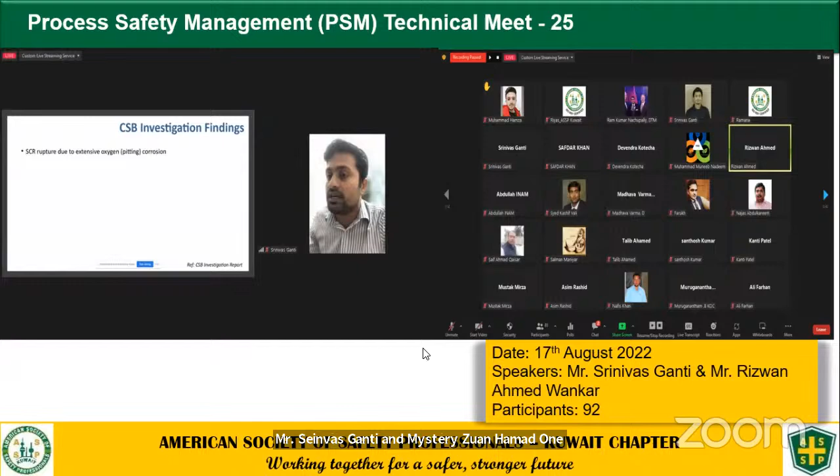We recently had a Toastmasters meeting, which is very important for us in our job careers, especially for enhancing communication skills. This is a good platform for our members and non-members who can join our Toastmasters Club.

We have a few upcoming events. As our President, Mr. Mazhar Sheikh, shared with you, we are very near to the PDC, and only 48 days are remaining. This will be the 11th PDC, and we are going to organize it face to face.

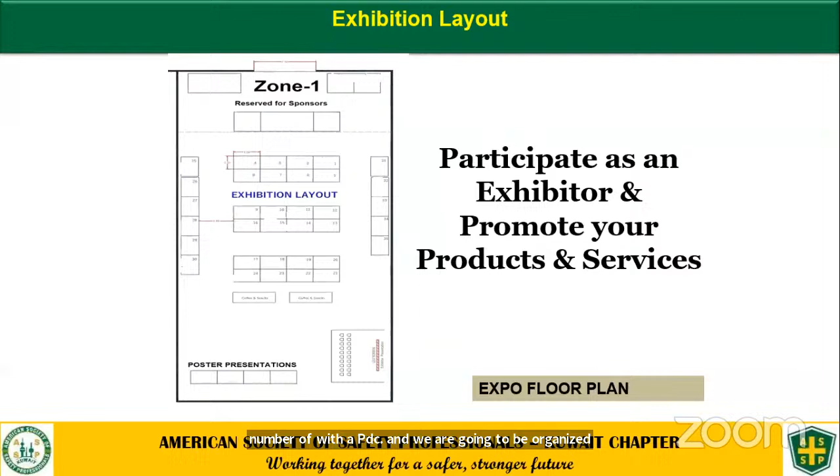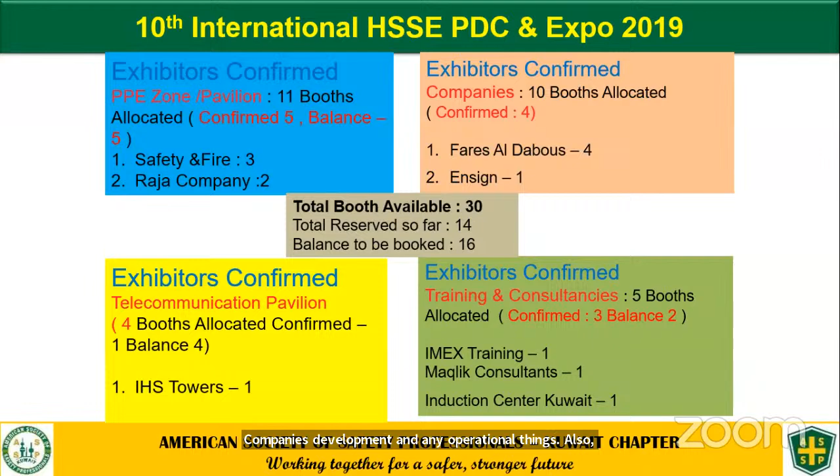We have the exhibition layout here. As participants, you can be an exhibitor and promote your company's development and any operational things. Details are in our brochures, and you can also visit our website to get more detail.

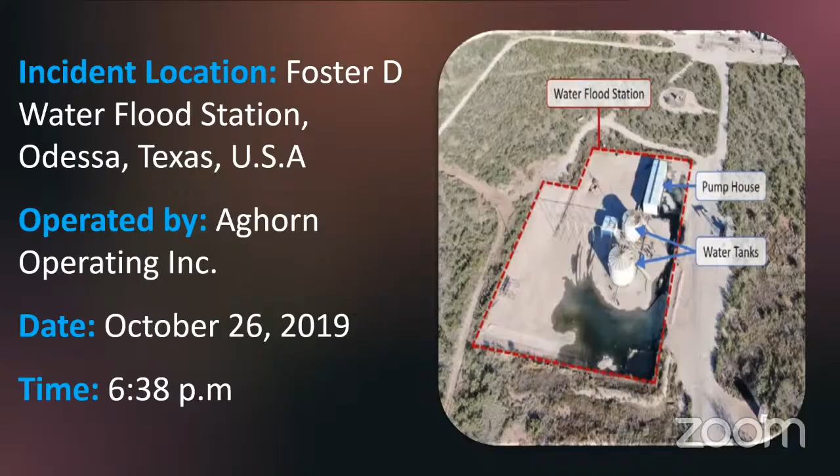So here you can see the incident location. It is operated by Aghorn Operating Incorporated. On October 26, 2019, at the Aghorn Operating Incorporated Waterflood station near Odessa, Texas, one Aghorn employee succumbed to toxic hydrogen sulfide gas that had escaped through a damaged pump. His wife was also fatally injured by the hydrogen sulfide gas while searching for him at the facility after he didn't return home. So our review of this event is about the unfortunate loss of 2 lives, but the lessons from this incident affect a multitude of other oil and gas facilities throughout the country that handle these kinds of toxic gases.

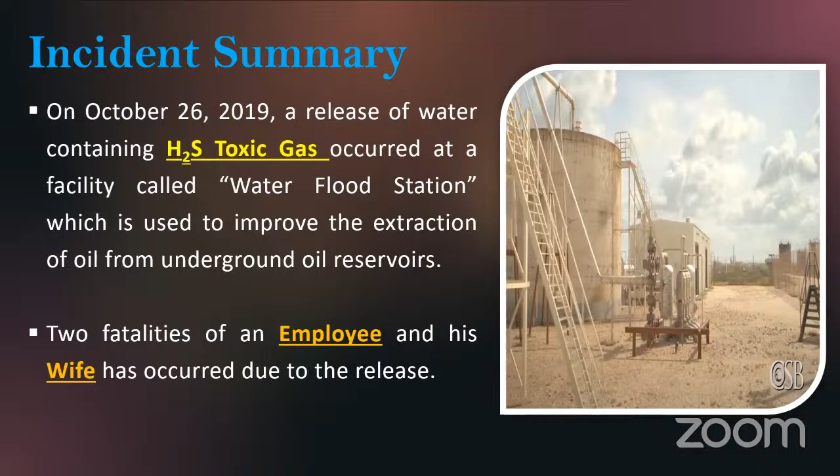This incident was both tragic and unnecessary, and we urge companies operating oil and gas facilities to understand the findings from this investigation and implement appropriate safeguards and trainings. We need to work together to ensure that our workers and community members return home safely every day. So before going to this incident summary, we will first understand the illustration of the Aghorn water flooding process.

The Aghorn water flood station is used as part of a process to extract oil from underground reservoirs in West Texas. Basically, there are two methods for extracting oil from the formation. First is by natural pressure, where the oil is extracted from the formation. The second, secondary method is injecting water by adjacent wells into that particular well, creating artificial pressure inside the formation.

The oil extraction starts at an oil well where pump jacks, which are artificial pumps, are used to lift oil from the underground reservoirs. The oil comes out from the ground along with some water. This mixture of water and oil is sent to tank batteries, where the water separates from the oil. This tank battery is a group of tanks connected to receive crude oil from the well. The oil is then transported for further processing, and the water is pumped through pipelines to the water flood station.

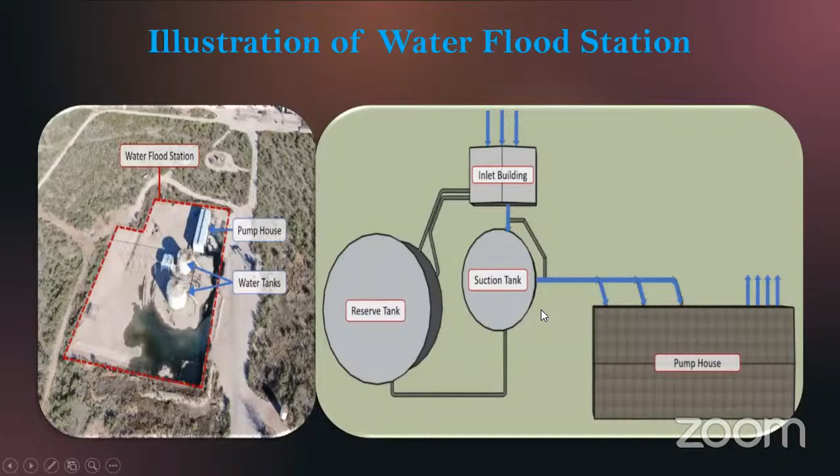The pumps are used to pressurize the produced water and inject it back into the oil field through injection wells like this. The injected water increases the reservoir pressure and displaces the oil, allowing a larger quantity of oil to be extracted.

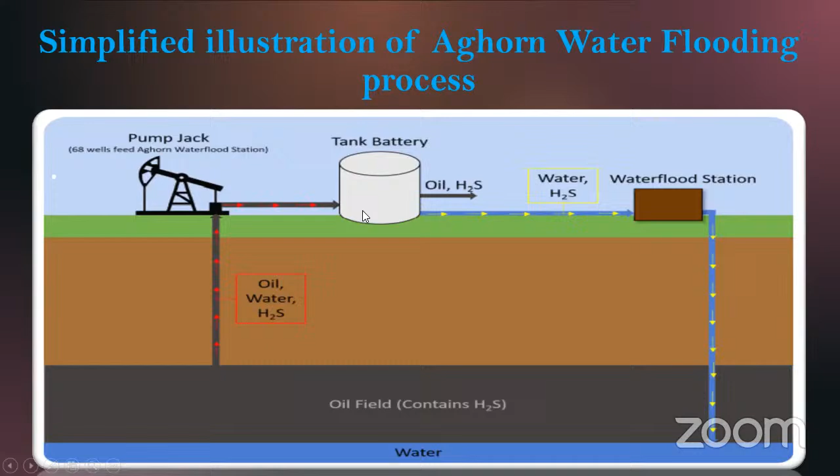At the time of the incident, there were 2 pumps in the pump house: pump number 1 and pump number 3. They removed pump number 2 for maintenance. The pump house also contains a control room from which employees run the station, and typically the station is not continuously occupied.

The employee who actually operates this pump house, or station, is called a pumper. His responsibility is to visit twice per day to record meter readings and inspect equipment. If there is an equipment problem and the pumper is not at the station, the alarm system triggers an automated phone call to the pumper from the control room, and it is then the pumper's responsibility to acknowledge the alarm and go to the station to determine what is causing it.

The station was also equipped with a hydrogen sulfide detection system, which would trigger a separate automated phone call to the pumper on duty if it detects dangerous levels of toxic gas. The system would also illuminate a rotating beacon light on top of the pump house. We can see here.

Then the pumper prepared for work on pump number 1. The pump could automatically start when enough water was available to pump to the injection wells, and it was still connected to its power source. At the same time, the pumper did not de-energize pump number 1. He closed pump number 1's discharge valve only, and partially closed the pump's intake valve.

While the pumper was near the pump, he was overcome because water was leaking from the plunger of that particular pump. He was overcome by this hydrogen sulfide, and he was fatally injured by this toxic gas.

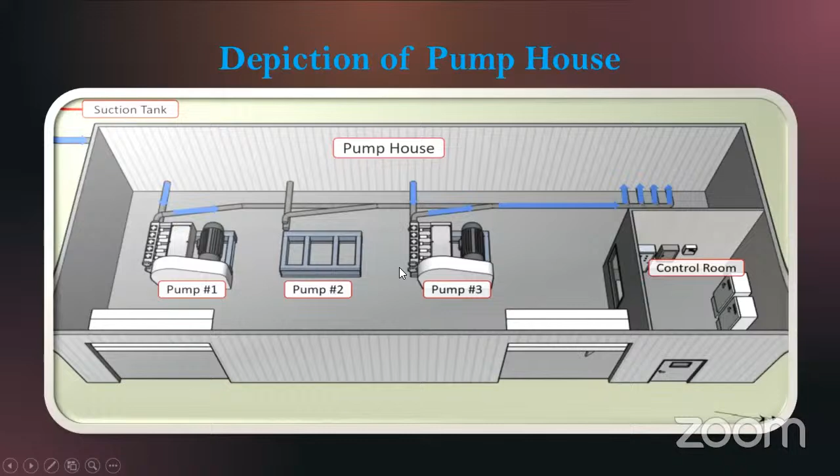After several hours, when he did not return home, his spouse also drove the car with his two children to the station to check on him, since he had not returned. Then she entered the Waterflood station facility and searched for him. She found him on the floor in the pump house.

Then she also was overcome, because she didn't have this kind of personal monitor and detection system. So she also was overcome by hydrogen sulfide, and she was also fatally injured by this hydrogen sulfide gas.

A short time later, the emergency responders approached the pump house and detected a very strong smell of hydrogen sulfide. This required them to set up a command post and use self-contained breathing apparatus. They found that the pumper and his wife were deceased inside the pump house, and water was continuously spilling from pump number 1. Then the responders rescued the two children, who were actually inside the spouse's car.

Then after that, the CSB, the Chemical Safety and Hazard Investigation Board from USA, analyzed six issues pertaining to this incident. One is that the pumper was not equipped with his company-issued personal hydrogen sulfide detection device, the H2S monitor, when he entered the pump house. On the night of the incident, he forgot his personal H2S monitor in his car.

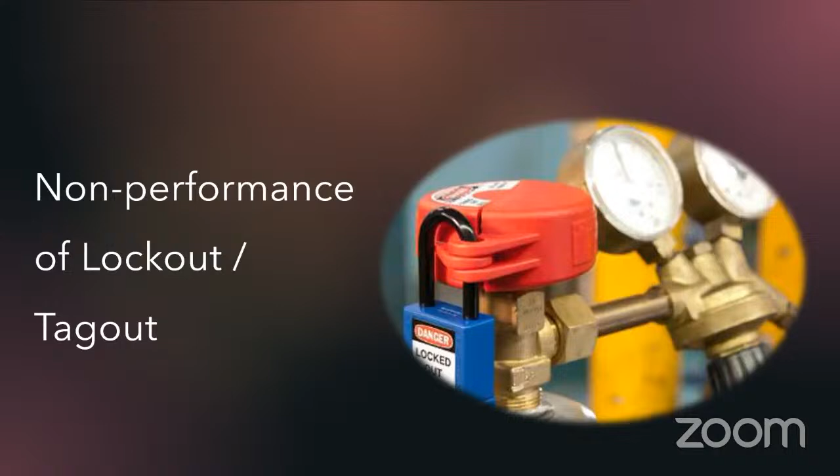The third issue they discovered is the confinement of H2S inside this pump house. There was no proper ventilation, which was inadequate, leading to fatal concentrations of hydrogen sulfide gas within that building. So this is also a major issue.

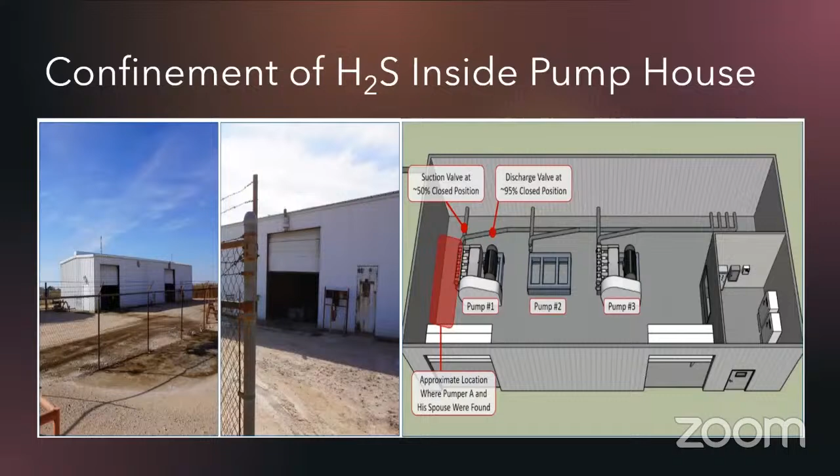The fourth issue they discovered is that there is a lack of safety management system. For example, there was no risk assessment, no training, and no hazard identification program.

The fifth issue they discovered is the non-functioning of the hydrogen sulfide detection and alarm system. Some of the facility detectors were set to testing mode, which prevented them from sending an alarm signal, and other sensors that were correctly set up were unable to send a signal to the control room. As a result, the pumper was not warned of the toxic hydrogen sulfide, either through a telephone alert or by illumination of the red pump house flashing beacon.

Finally, they discovered there was a deficient site security problem. There was an informal policy that when an Aghorn employee is working at a facility, the exit gates are normally left unlocked. On the night of the incident, this practice allowed the pumper's spouse to drive directly to the waterflood station and enter the pump house, where she was also fatally injured.

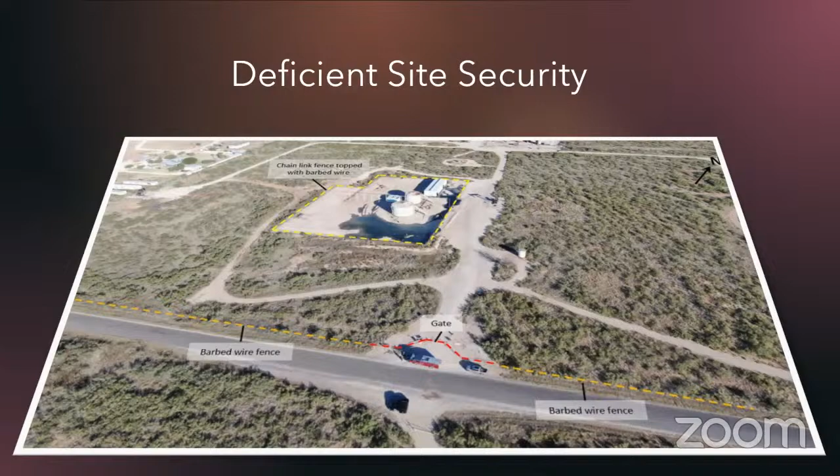Following the recommendations received from the CSB, there are some key lessons learned from this incident. Employers and organizations should take action to ensure workers always use the required safety equipment. They have to mandate the use of personal hydrogen sulfide detection whenever working in areas prone to hydrogen sulfide.

They have to develop site-specific, formalized, and comprehensive lockout and tagout procedures and policies. Third, they have to commission an independent and comprehensive analysis of each facility to examine ventilation and mitigation. Fourth, they have to develop and demonstrate the use of a safety management program focused on protecting workers and non-employees from hydrogen sulfide.

At facilities that handle toxic gases, gas detection and alarm systems must be adequately designed, maintained, and tested. Lastly, industrial facilities should ensure an effective site security system is in place to prevent non-employees from entering the facility. So these are the lessons learned that we have to implement in our facility. Okay, thank you.

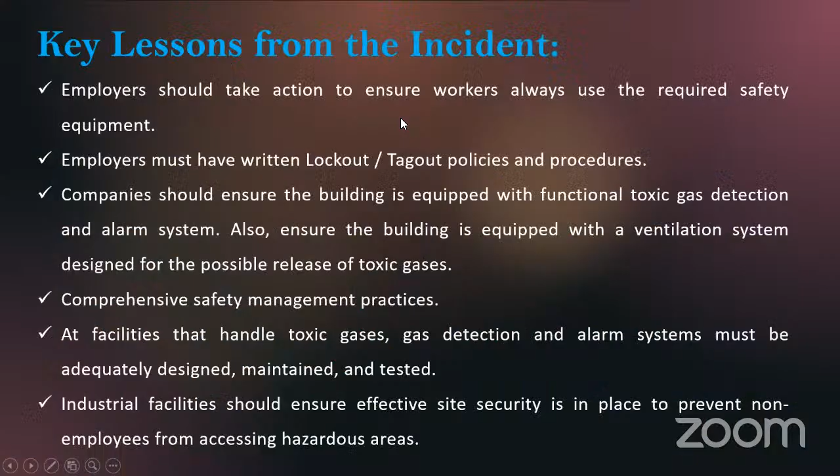Thank you, Salman, for your brief and very well presented presentation on the toxic gas H2S and how it killed the employee and also his wife. You have explained very well, mashallah. Thank you very much. Now the forum is open for questions and answers.

If participants have any questions, please go ahead. Thank you. Any questions? Please raise your hand so we'll unmute you. If anybody has any questions, please raise your hand. We will wait two more minutes and then proceed. I think Mr. Ashok sir is here, he raised his hand. Yes sir, please share your question.

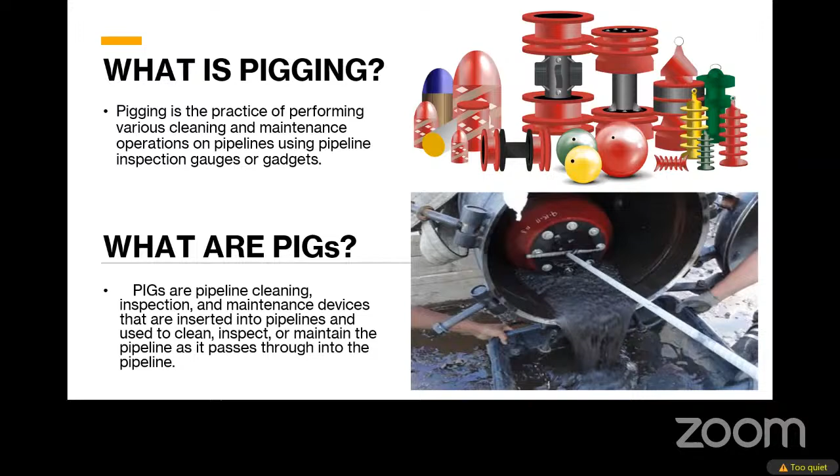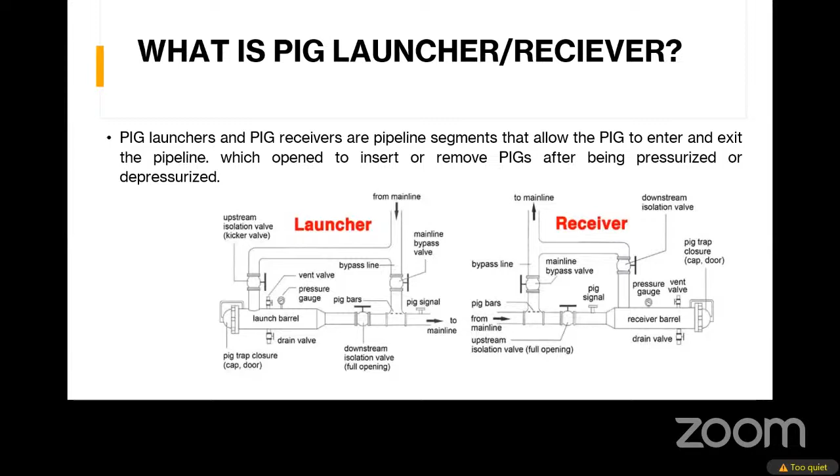Now we move forward to today's lesson learned. On June 25, 2012, at a production facility somewhere in North America, one of the global leading companies hired a contractor to guarantee safe pigging operation. During preparation for a pipeline inspection using a pigging operation, a temporary pig launcher attached to a pipeline was overpressurized and failed. This incident caused one fatality and the hospitalization of 2 individuals.

See here - the trap valve between the pig launcher and the pipeline had mistakenly been left closed, and the experienced inline inspection team assumed the pipeline valves were in the proper position and started purging the line with nitrogen from a nitrogen truck.

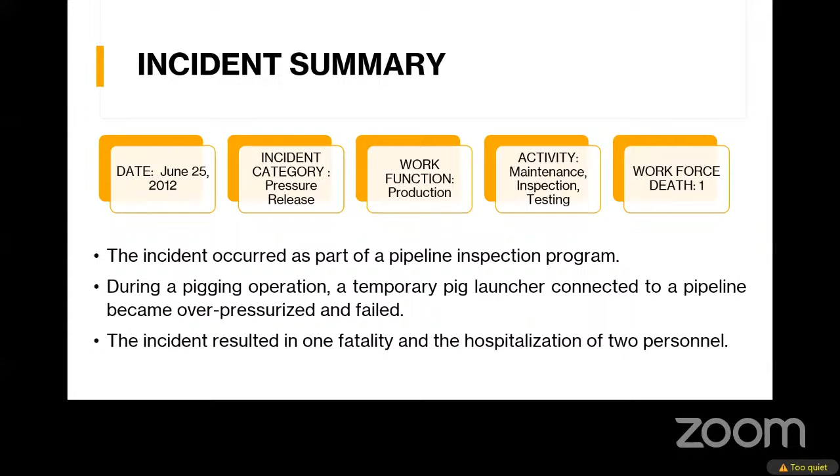When the initial pressure was applied, the pressure gauge on the pig launcher apparently read zero. This seemed to urge the team to apply more pressure on the pig, as they felt pressure wasn't being applied, so they increased it.

It was believed that the gauge overranged within seconds of starting pumping, and when the gauge needle was pushed up against the zero stop, it appeared to show zero pressure.

Within minutes, the temporary pig launcher was pressurized beyond its mechanical burst pressure. Because it had no pressure relief device, it was finally pressurized beyond its burst pressure, resulting in an explosion.

Incidents are never meant to happen. They happen as a result of single mistakes, and when we look at the process safety factor, they are disastrous. Many lives were lost due to some minor error and decisions.

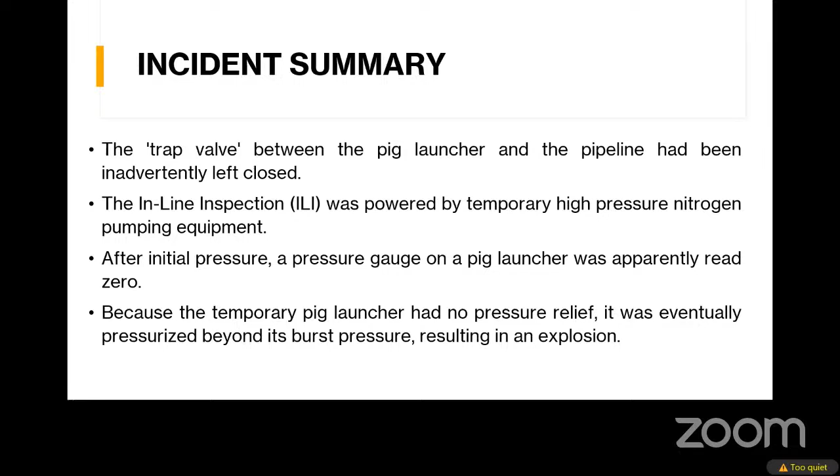So what was the root cause actually?

If we can't use the proper equipment at the proper place, it could be a disaster. We have to make sure before doing any test on a pipe.

First, the pumping equipment was capable of delivering pressure far in excess of the design pressure of the launcher. Second, the risk associated with the high pressure to low pressure transition had not been fully recognized by the team.

Eventually, there was no pressure relief valve on the temporary pig launcher. It was also observed that during the design stage, they did not consider the temporary pigging operation.

We all know the importance of HAZOP. They did not specify the temporary pig launcher during the HAZOP, a technique involving mitigating hazards and implementing precautions by a knowledgeable and professional team.

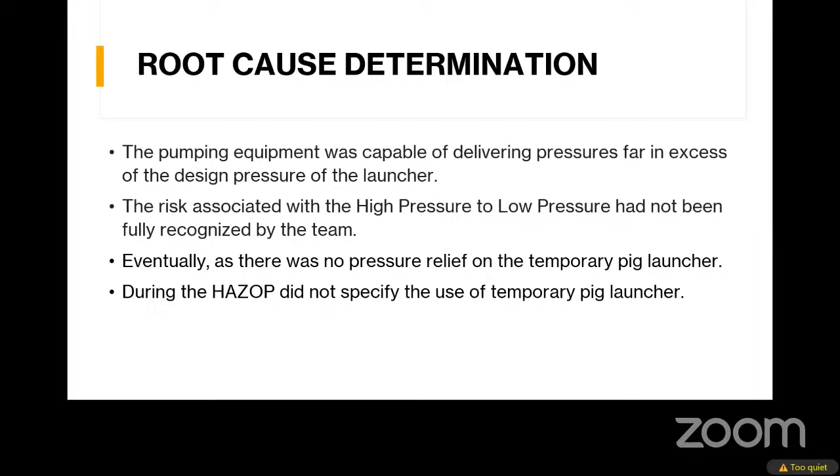So the operator increased the pressure, and when the pressure gauge didn't deflect, it meant the competency of the working crew was not verified and assessed. They increased the pressure without observing or informing the work crew why the pressure gauge wasn't working, and the procedure did not specify the need for a pressure relief device.

It looked like a man planning to cook some sweet food but not having the sufficient recipe—it would become something different.

There was also no thorough risk assessment available and no clear risk control defined. Equipment like the pressure safety device was not calibrated and maintained, training to the working crews was inadequate, and the method of statement present at the work site was improper.

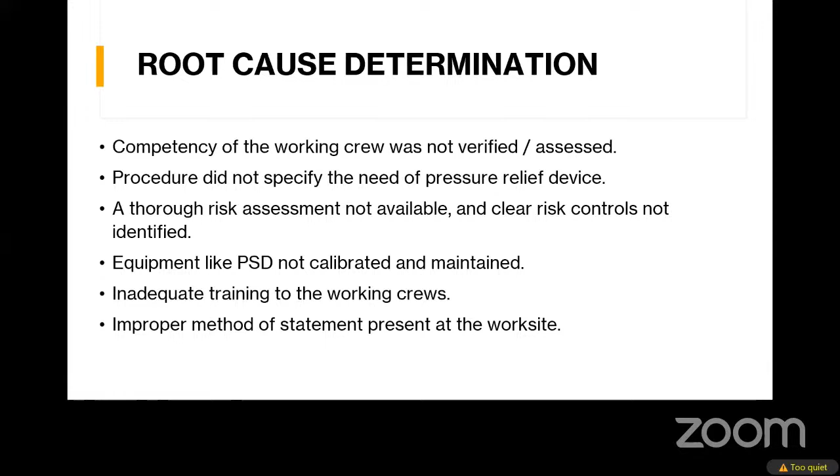So what was the lesson learned? The design of the temporary pig launcher and the PSD shall be verified by the engineering team and approved by a third-party inspection company.

It's like a safety valve, relief valve, temperature and pressure devices—everything should first be inspected by the approved company and calibrated.

A pressure safety device must be calibrated on a regular basis. A thorough risk assessment must be carried out and clear risk controls identified, as risk assessments are a very important, integral part of process operation.

Individual worker behavior is critical, and during the design phase, all activities must be clearly defined and stated in the HAZOP. Only competent workers shall be assigned to carry out the task.

Individual worker behavior is critical for any organization's health and safety management system. If one worker behaves in an ideal, safe manner but another does not, that other worker endangers others despite one person being safe.

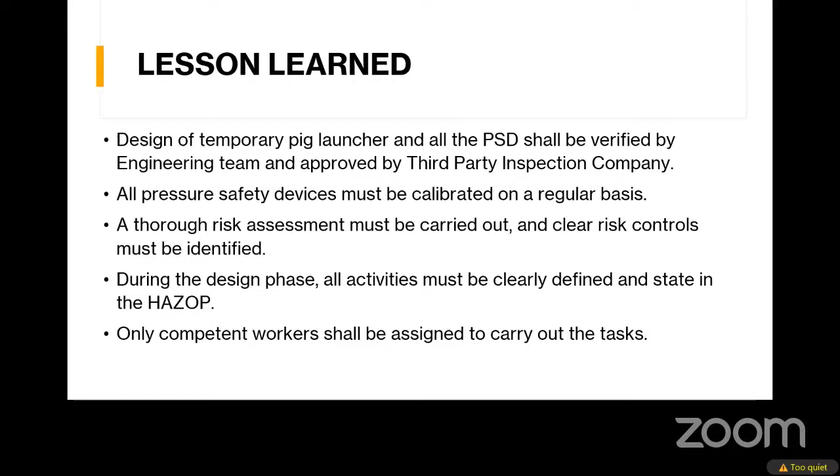The competency of the contractor and its personnel should be verified prior to the start of work. Procedures always need to be reviewed and updated accordingly by safety experts.

Moving forward, the procedure always needs to be reviewed and updated accordingly by the safety experts. Let's see the factors of process safety.

We all know the difference between process safety and personal safety. Accidents involving personal safety tend to occur very frequently but often have little consequence. Conversely, process safety incidents occur infrequently but can often have catastrophic results when things go wrong. We take all precautionary measures and strict guidelines, but mistakes still happen in the process, like rapid overpressure events, gas leaks, explosions, or release of highly toxic or energetic material.

So the first factor was contractor management. We should always consider this before selecting any contractor.

We should have to check and review the risk assessment and all the items like accident and incident history, policy, and everything. So in this incident, they didn't assess the contractor before hiring to start the pigging operation.

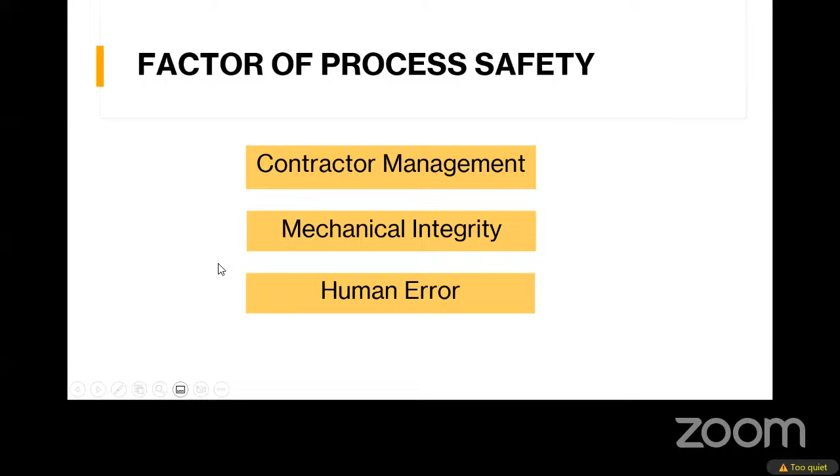I would like to conclude this. Thank you.

Thank you, Tarique, for one of the great experience sharing incidents of pig launcher. I hope many of us also might have seen similar types of incidents in our projects. It is common in most pipeline projects. Not only pipeline projects, even where we have GCs and booster stations, where pipelines have been part of the scope and where we are doing this pig launcher, it's a very common incident regularly happening in every project. At least you can say the likelihood is once in two years we can hear this type of incident, even in GCC. That's a very good presentation. Thank you, Tarique, for explaining all the root causes and lessons learned. Now the forum is again open for questions from the participants. Please go ahead. Thank you.

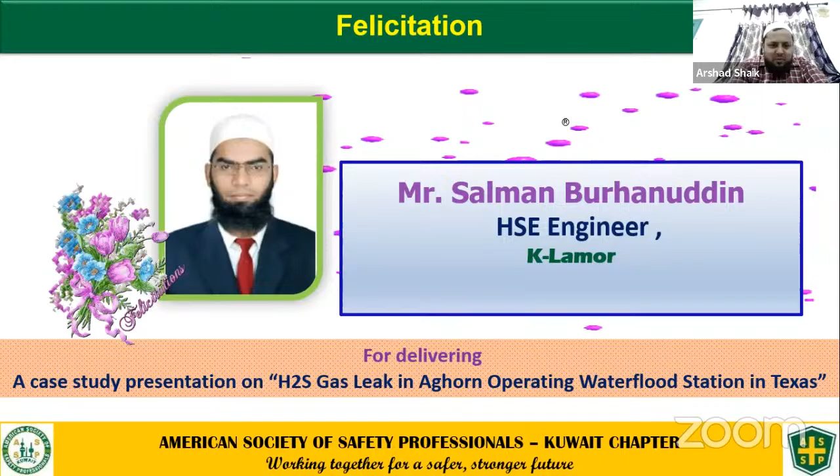Now it's time to announce the quiz winners. Mr. Ramana, now the forum is back to you.

Thank you. Congrats, Mr. Salman. He is our deputy for PSM, and thank you, Salman, for nice participation.

Congratulations to Mr. Nitin Kumar. He was the first one to join our technical meet today in the morning, sorry, in the beginning. Congratulations to you, Mr. Nitin. Thank you very much.